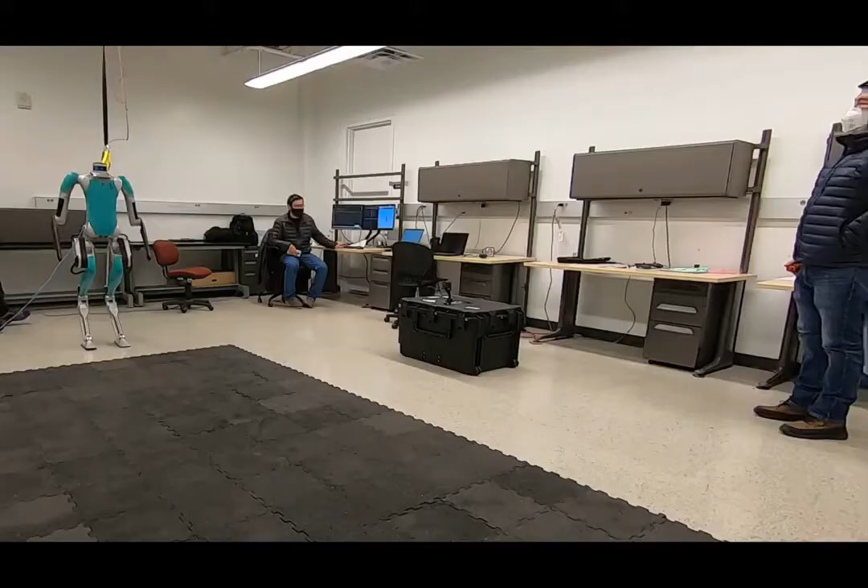In this work, a hierarchical and robust framework for learning bipedal locomotion is presented and successfully implemented on the 3D biped robot Digit. We propose a cascade structure controller that combines high-level trajectory planning with low-level intuitive feedback regulations.

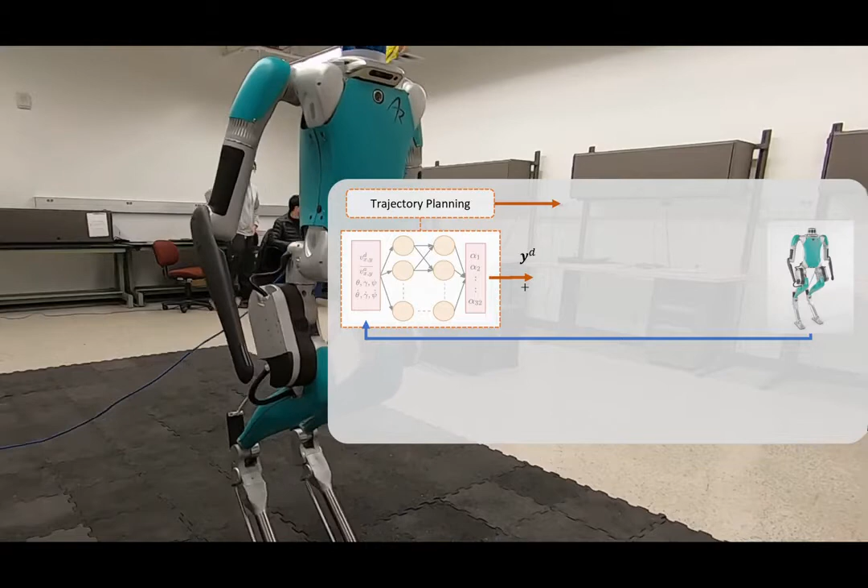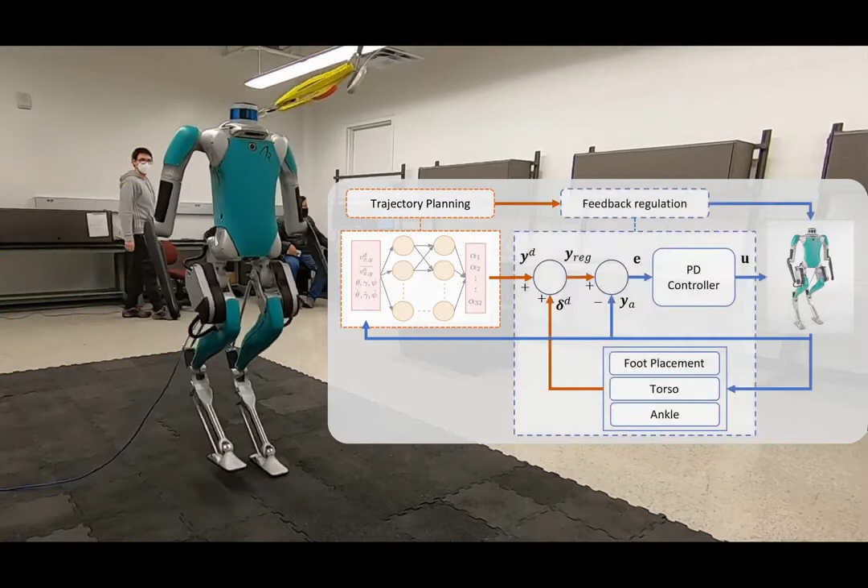The high-level learning-based policy propagates reference motion trajectories in real time at a low frequency compatible with real hardware implementation. This encourages the stability of the walking gait by modifying the reference trajectories according to the reduced state of the robot. The low-level model-based regulation applies compensation to the reference trajectories at a higher frequency based on instantaneous state feedback.

This feedback-based trajectory regulation compensates for uncertainty in the environment, and based on our experimental observation, it is one of the key factors leading to effortless sim-to-real transfer.

In addition, we implement a learning pipeline that considers feasible initial poses of the robot that can be implemented in hardware. For this, a standing controller is used to bring the robot to a stable pose after powering the robot up. The process is repeated to collect a set of initial states for the training process.

After the training, the policy is tested in simulation, and finally the policy is tested in hardware.

Here we show the training process of the policy. We note that the walking policy is learned from scratch and does not rely on known reference trajectories. As the training progresses, we see that the policy learns stable and robust walking gaits.

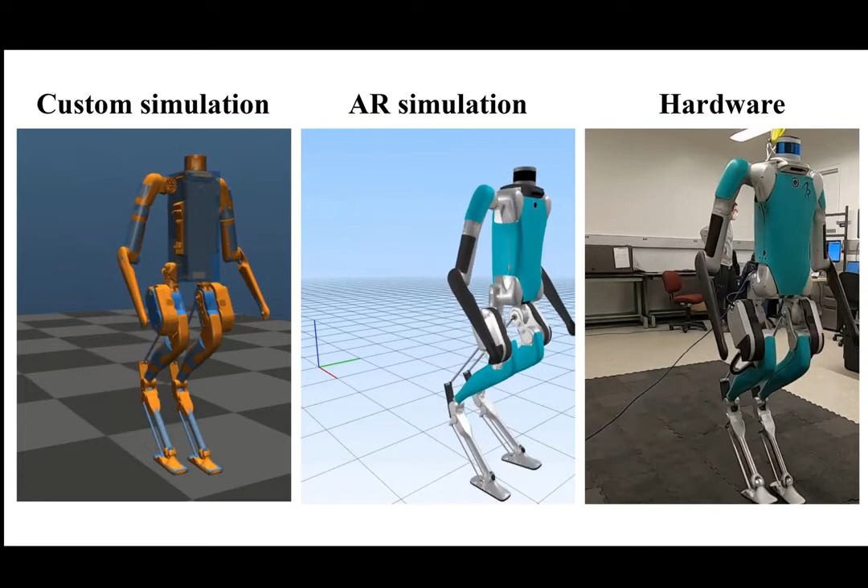We demonstrate that our learning pipeline and controller structure allows transfer of the learned policy between different simulation environments and from simulation to the real robot, without using randomized dynamics in training or extensive hyperparameter tuning.

Experimental results on Digit show that the policy is robust against external disturbances applied to the robot in different directions, even though the policy is trained without disturbances.

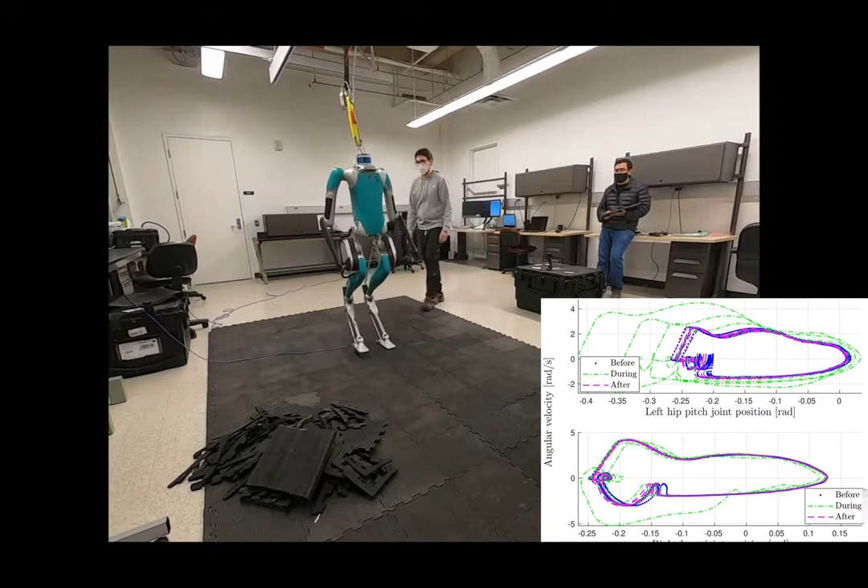The limit cycle of the robot's joints shows that the policy is able to recover effectively from the push, as the joint limit cycle returns to a stable periodic orbit after the disturbance.

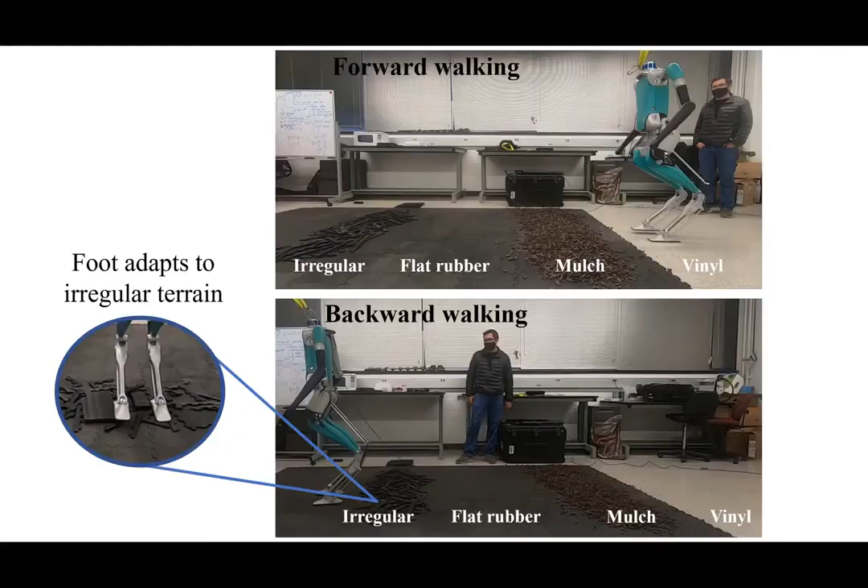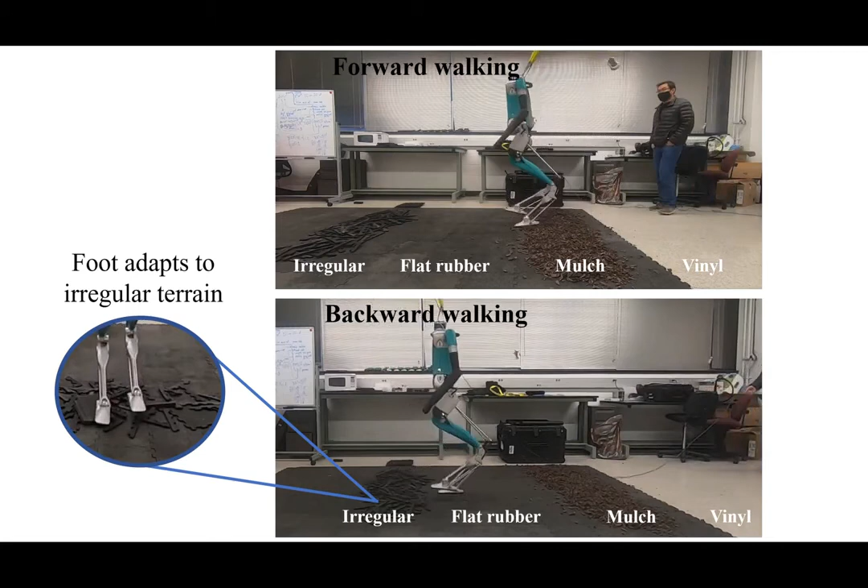To further evaluate the robustness of the learned control policy, we make Digit walk forward and backward on various terrains with different levels of difficulty. These terrains include flat vinyl ground, mulch, flat rubber ground, and irregular rubber terrain. The controller is able to adapt to any of these terrains while keeping a stable and robust walking gait.